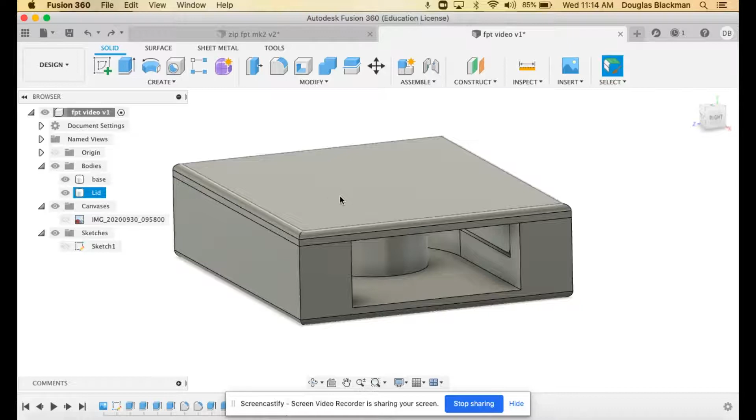With both of our bodies complete, we're now ready to export this, ready to be sliced, ready to be 3D printed. So I'm just going to show you how we're going to do that. Now, the first thing is that we're going to want to not print this with these two pieces together because they'd end up sticking together.

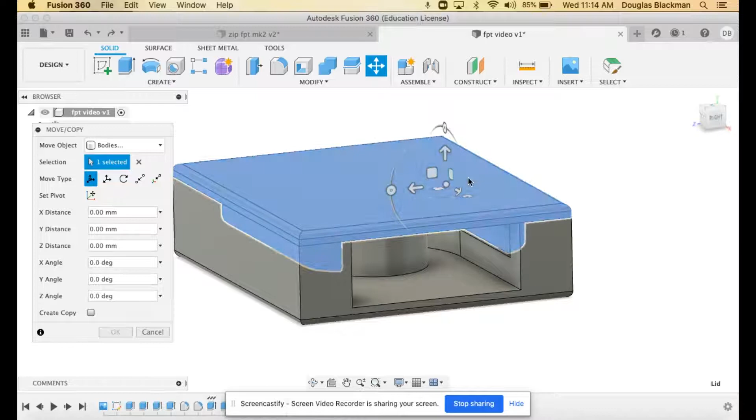So I need to separate them. I'm going to select the lid, and I can either press the M key on the keyboard, or I can right click and select Move Copy. This will allow me to move this around. And you can see I get this little thing up here. This allows me to rotate in different axes and to move in different axes and also move across a plane.

Don't ever use the dot here unless you're just moving it out the way, and then you're going to press the undo button to bring it back. This will just take it to a random place. This is a really bad tool to use.

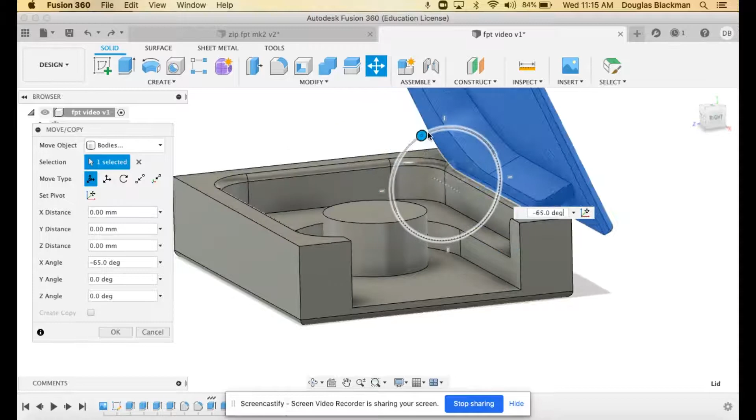So what we're going to do is we're going to press this one here, which is going to rotate to open, kind of like opening it like a book. And I want to rotate this round to 180. Don't go to 185, don't go to 175, make sure you go to exactly 180.

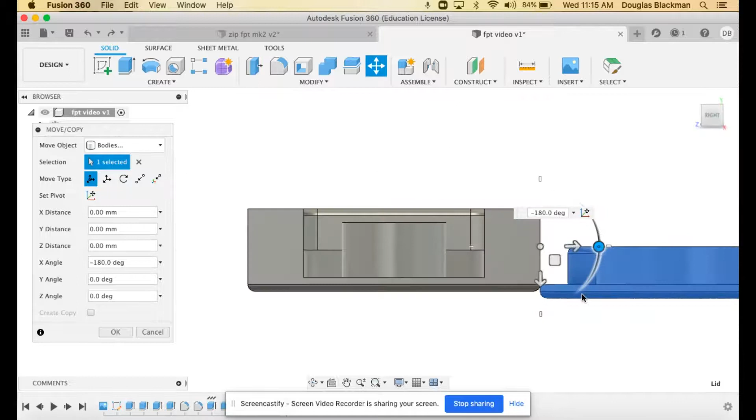Next, I'm going to use the orbit cube to get a side view of this to make sure that both of these are sitting flat on the floor. So I'm going to press the right, and you can see that this one is slightly further down than the other one. So I'm going to use this arrow here, and this allows me to move it up and down.

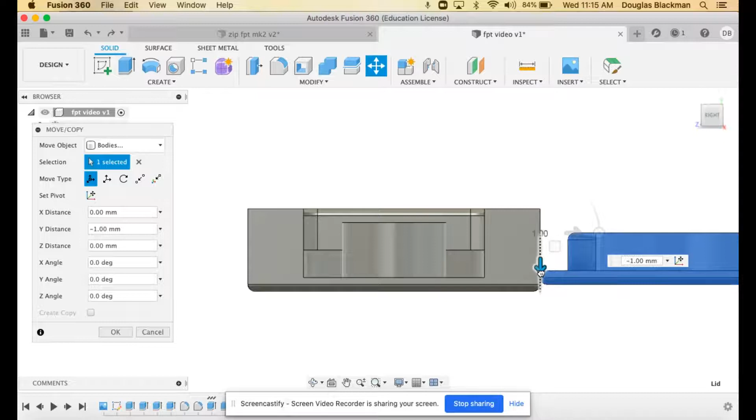Now, it's kind of annoying—it either jumps below or jumps above. So if we zoom right in on that, we can see it's jumping by 1 millimeter, so it's either above or below. I actually need to move this up by just minus 0.5 of a millimeter.

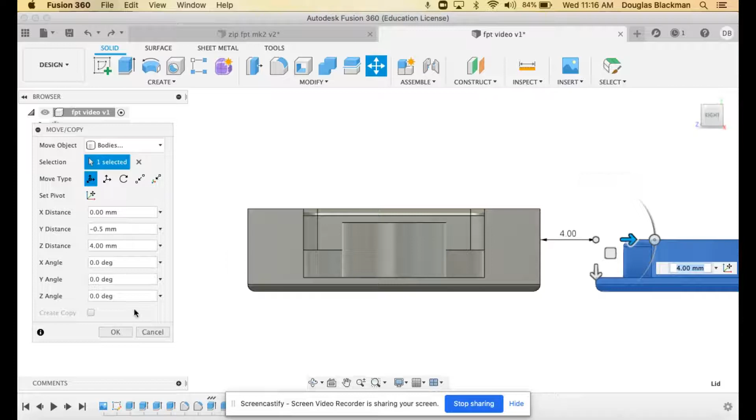And just before I do that, I'm just going to have a quick look and make sure that these are lined up at the top. You can see if I press the top on the cube there, this is lined up nicely. This looks good, so I'm going to press OK, and press the little house button again on my orbit cube so I can see everything.

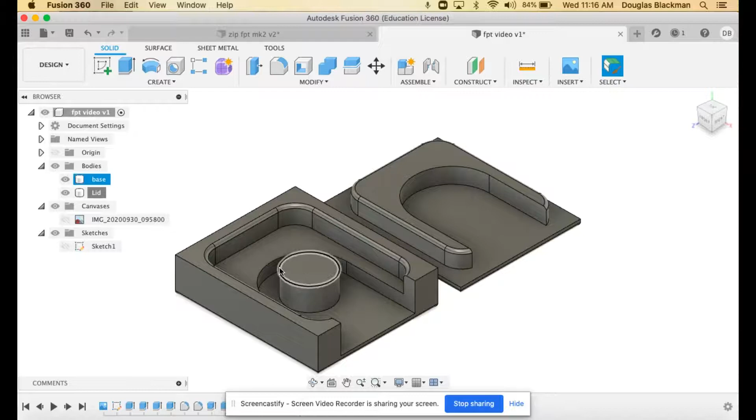Now that we're ready to export this, I need to select both of these to export. If I was only printing one, I could just go to the body, right click and go to save as STL, but I actually want to print both at the same time. In order to do this, I'm going to go up to this top box here, which selects everything, and it will save this as an STL as long as both are visible.

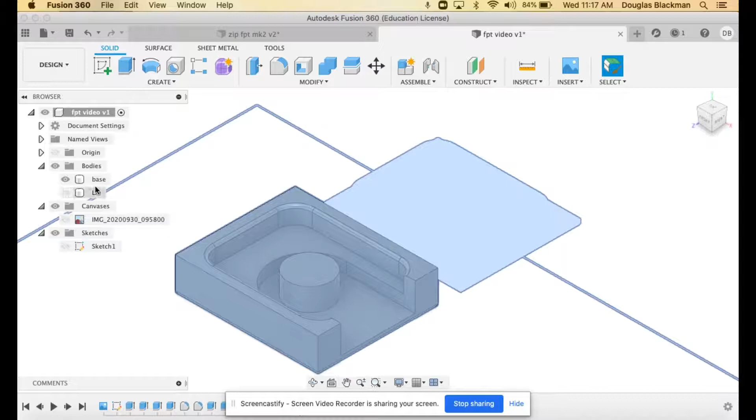If I make one invisible, like last time, it will ignore it. So make sure that they're both visible. Right click on here and click Save as STL.

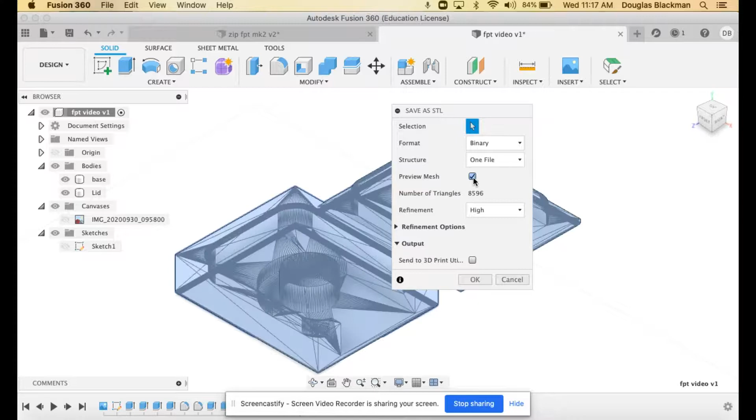And you should get a dialog box up that looks the same as this. So we want it on binary, one file. You don't need to preview the mesh—the mesh is what an STL file is, but we can have a quick look at what that looks like. You can see this is what it looks like. And we've also got refinement high.

And there's also an option here to send to a 3D printer utility. So if you download the Prusa software, you can actually select it here and get it to go straight into the software. But for today, I'm just going to save it as a file.

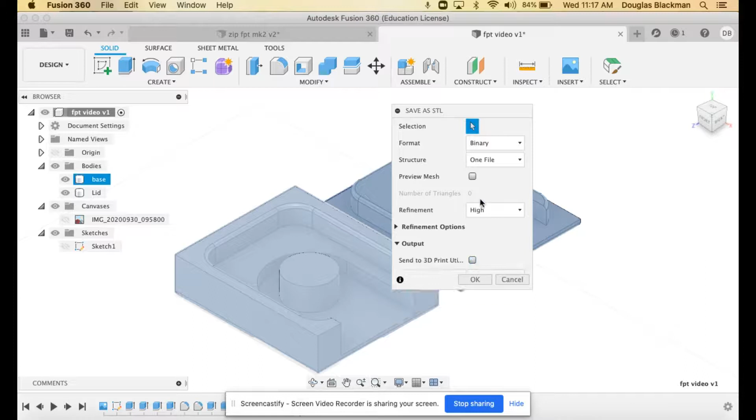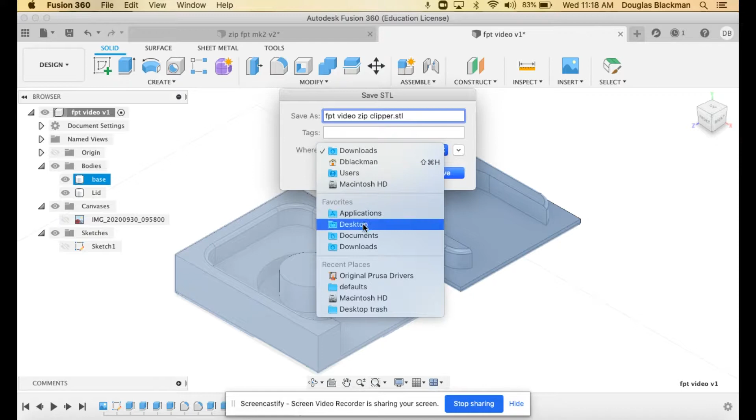So I'm going to press OK on these settings here. And it's then going to ask me, what do I want to save this as? So I'm going to save this as Focus Practical Task Video Zip. And that's going to go into my downloads, so I'm actually going to change that and make it drop into my desktop so it's easier to find. And I'm going to press save.

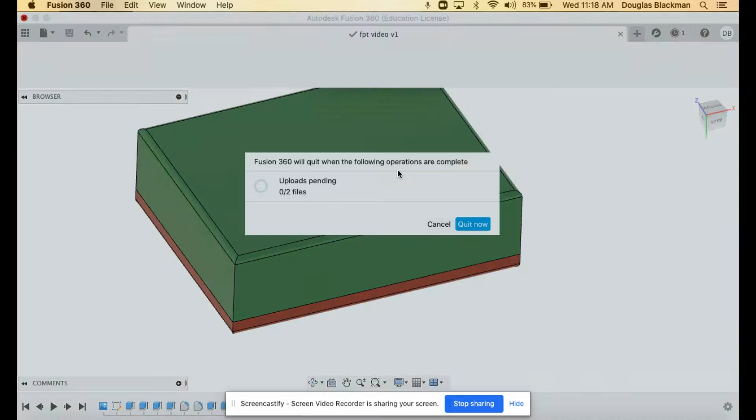With this saved, we can save our work in Fusion. We don't want to lose this. And we can go ahead now and actually shut Fusion down, making sure that we wait for it to fully save. It's prompting me to save my other piece of work, and wait for this to go from 0/2 to 2/2, otherwise it won't save properly.

Next, we'll be learning how to load up that STL file.